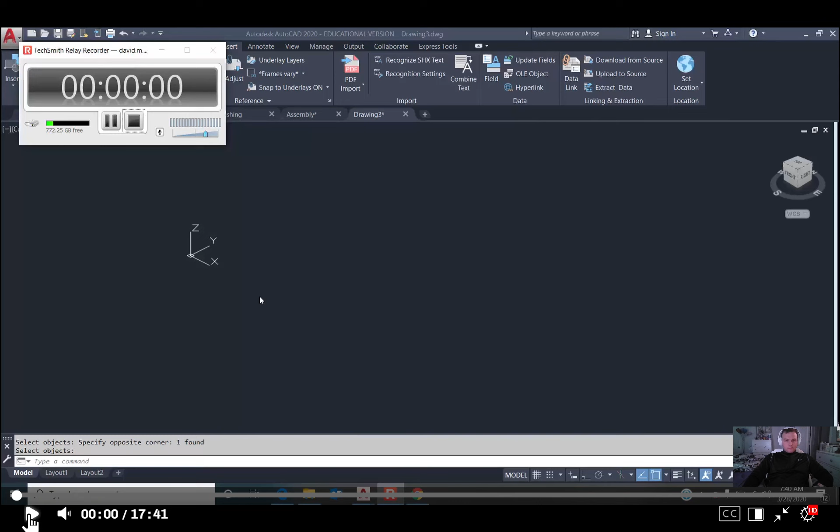Okay, for this unit, we're going to make an assembly. We're going to create three drawings: a base, a cap, and a bushing. Then we're going to assemble them, take them and put them in a drawing. I have provided for you the bolt.

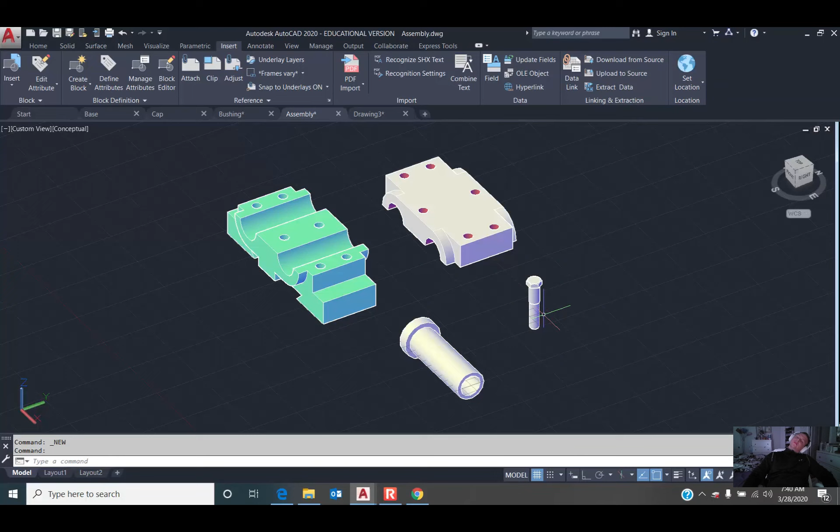So we have the base, the cap, the bushing, and the bolt. The first thing we want to draw is the base, so let's start drawing that. You can find your PDF files if you need them, the ones in the drawing that have all the dimensions. Look at the PDF file as you have done in other classes, and draw from that using those dimensions.

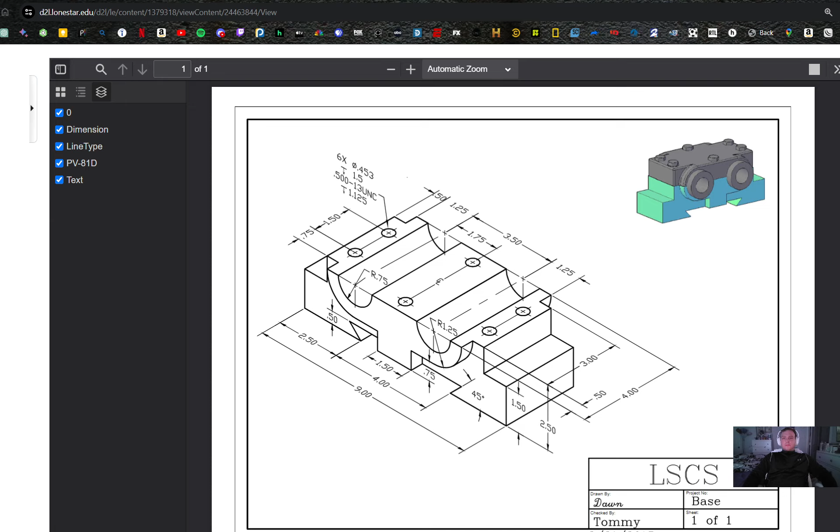So the first thing we want to do is go over here and draw a rectangle. Let's start at 0, comma 0 from the keyboard, and then it's 9, comma 3 units. Now be careful, it's 3 units.

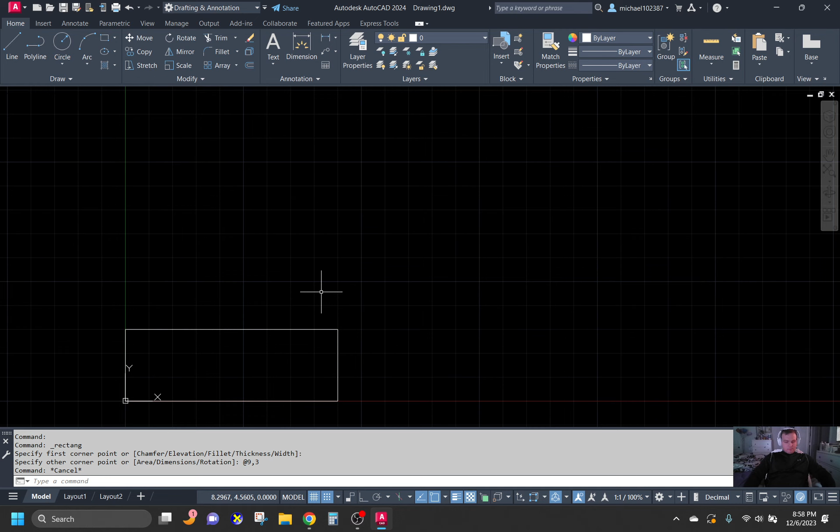Now let's go ahead and extrude that up. We're going to use the extrude command, grab that, and pull it up. The height of this extrusion is 2.50. Okay, we're going to put it in.

Now what we want to do is start working on making these cuts in here. I'm going to go ahead and start the second part up here. So let's take our UCS first. UCS, 3 points, 1, 2, 3.

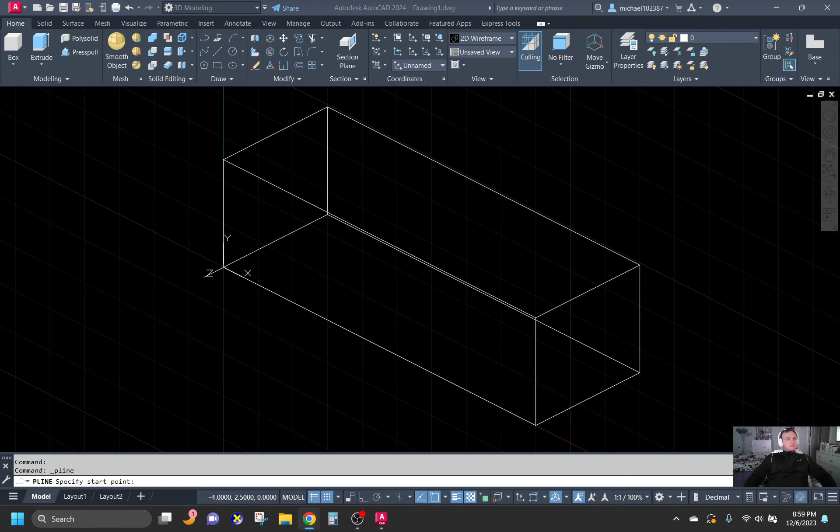I'm going to use my polyline like I have done in the past, and I'm going to cut out these two edges right here. I'm going to come over, it's 1 unit over this way, and 1 unit down, 1 unit over here, and 1 unit down. So 2 notches over here.

So let's do it, let's use a polyline. I'm going to pick a point there. I'm going to come over with F8, which is going to allow me to move over this direction straight, 1 unit, and then move down 1 unit. Okay, I'm going to come over here and draw a rectangle.

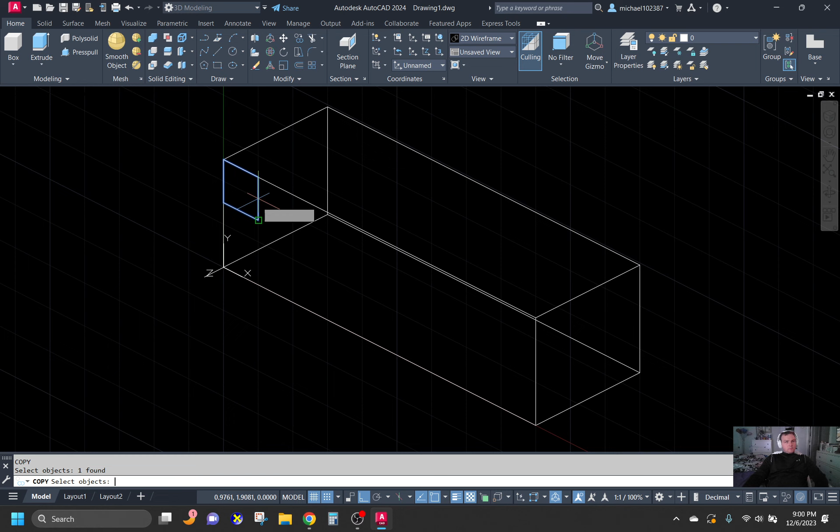I'm going to copy, CP for copy from the keyboard, copy that to this element over here. Then I'm going to extrude both of these elements, pull them through. Now let's subtract them: main object, enter, take these two elements out. I'm going to go ahead and erase this polyline that I used for a guideline.

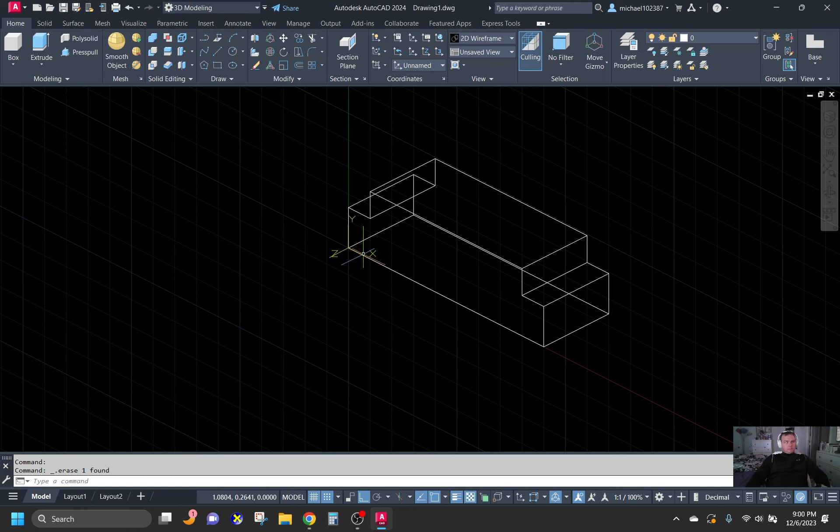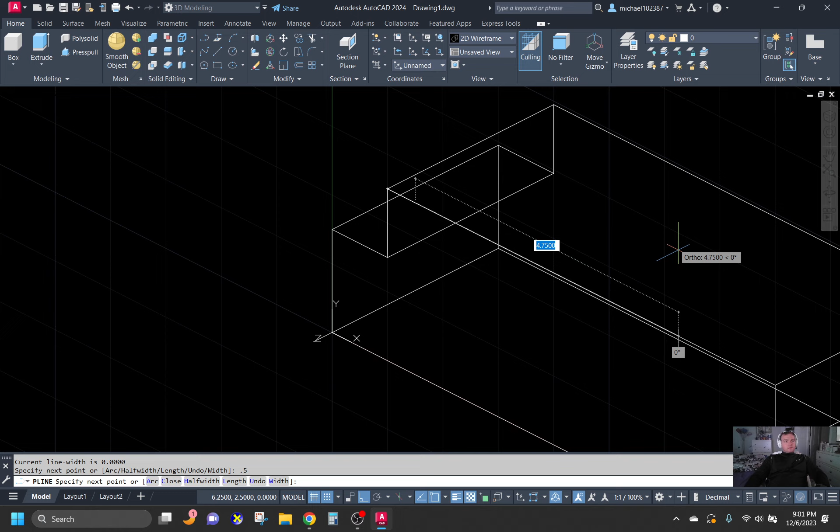Plan, okay, that will turn the view normal to the screen. The UCS, the X and Y will be normal to the screen. So now we can draw. I'm going to draw a polyline and pick a point.

Again, just 0.5, that gets us to there. And then 1.25 gets us to right here. And then we're going to go over 3.5. Okay, that'll get us to here.

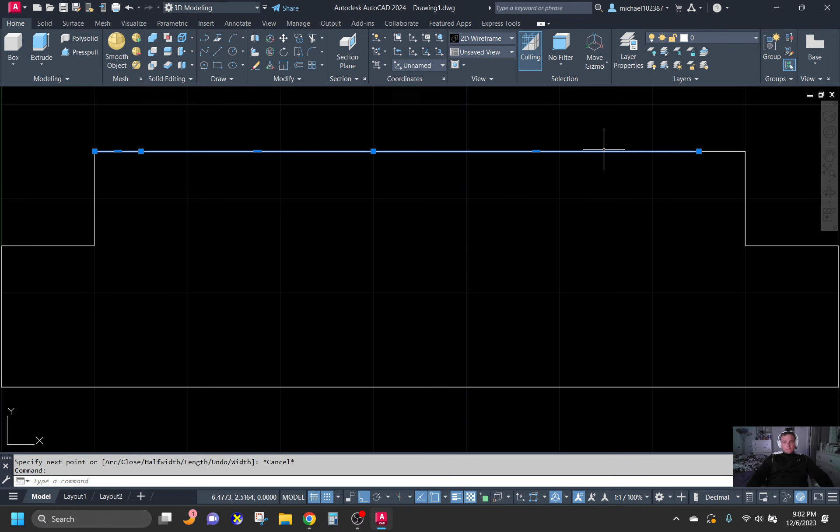Then I'm going to come back and say C for circle. You can use the at or the object snap. I'm going to pick a point. Again, just 0.5, that gets us to there.

And then 1.25 gets us to right here. And then we're going to go over 3.5. Okay, that'll get us to here.

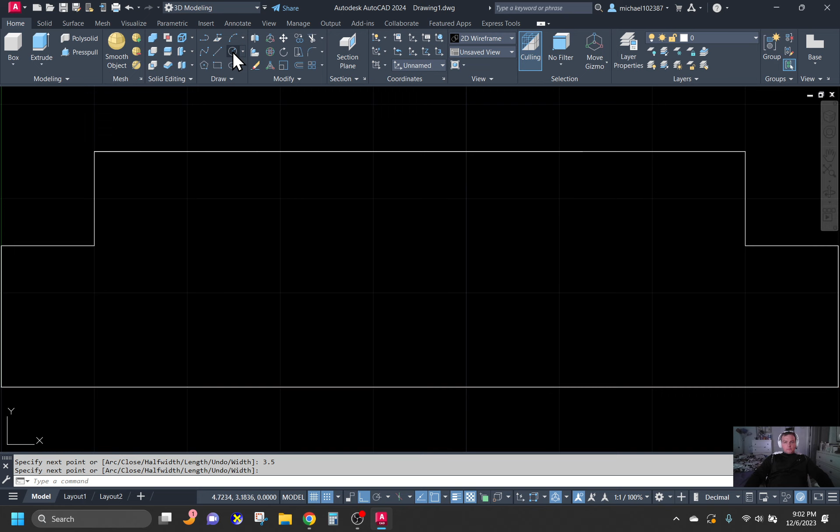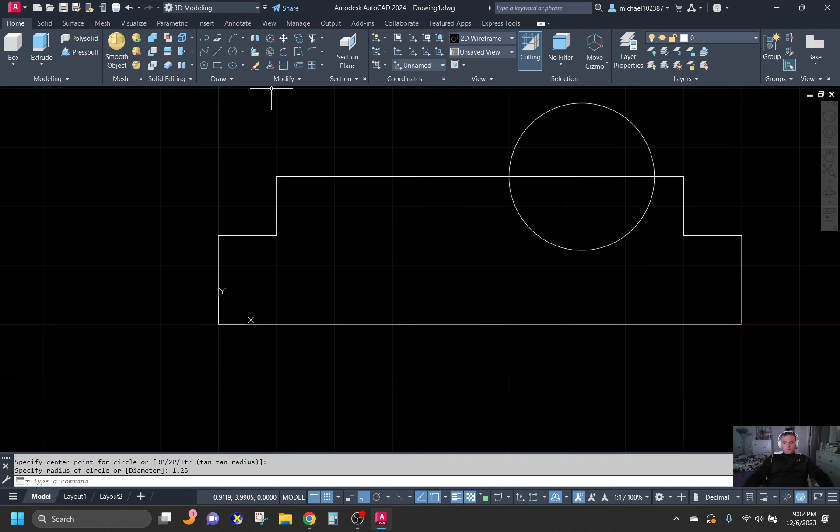Then I'm going to come back and say C for circle. You can use the at or the object snap. Find your last point, and the radius we want on this is 1.25. Enter repeats the last command. Find the last circle, put it in there.

Now I'm going to draw a polyline. I'm going to go from the quadrant of my element here to the quad of this element over here, just like that. Okay, now I'm going to draw another polyline on top. I'm going to use that for a trimming line.

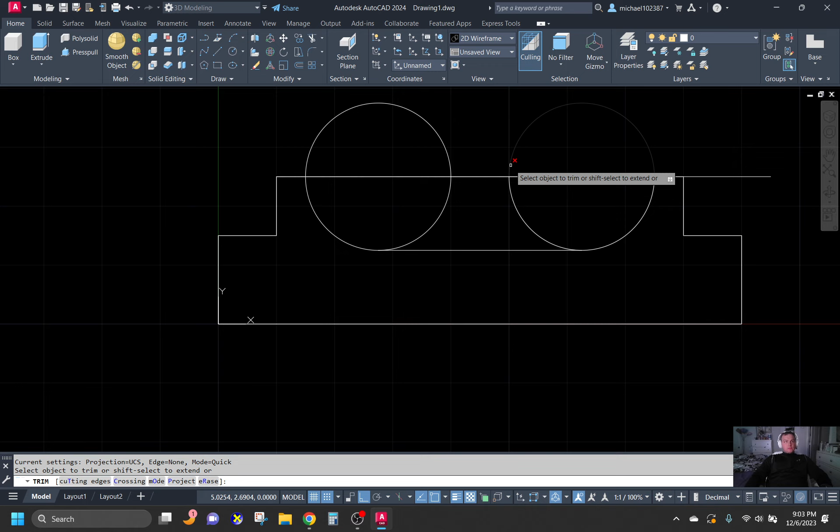Okay, trim, TR for trim from the keyboard, enter again. Then touch the elements you don't want. We don't need this piece, or this piece, or this piece up here. Okay, this is what we're wanting right here.

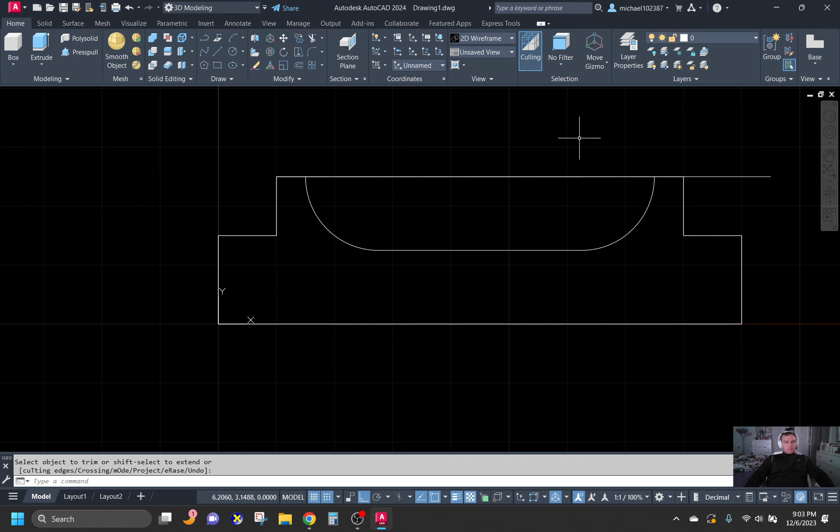I also need to draw a piece right here: 1.5 down, 1.5 over, 1. So let's use the polyline. Again, I want to go to the midpoint, just the midpoint right here. Now the reason I use the 2D poly is so it stays on the same z-axis. So we only want to go down 0.75, correct?

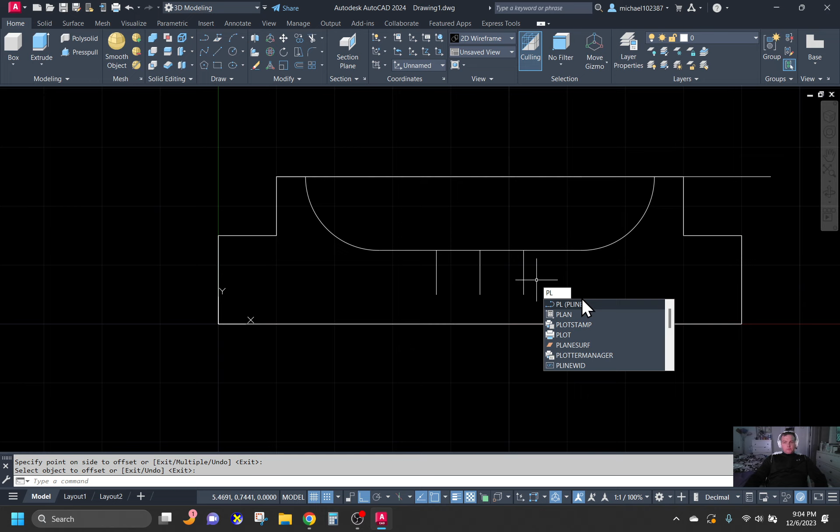Okay, now let's offset 0.75. 0.75 on this side and on this side gives me a total distance of 1.5. Then I'm going to draw another polyline right here. Okay, so let's erase this.

Let's trim, TR for trim from the keyboard. Enter, trim this out. So far we have this. I'm going to erase this line we used for the trimming line a while ago.

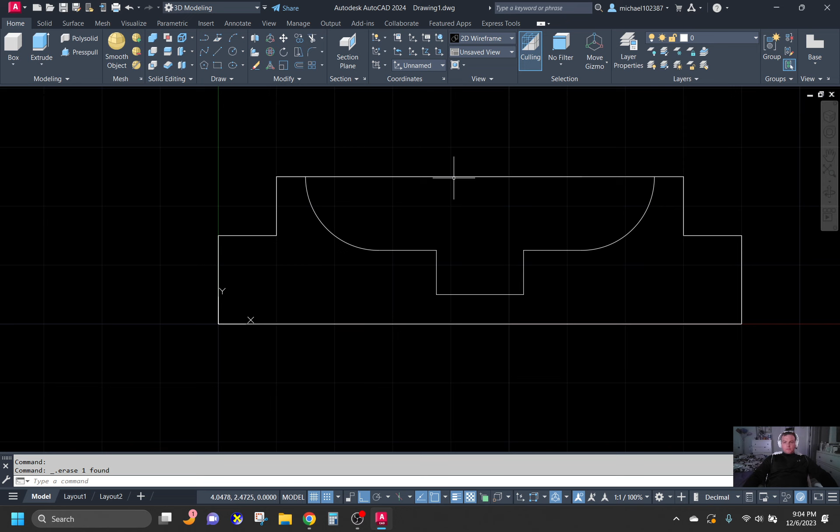Turn my VP 315, 315.30, so you can see it, there it is. Now I didn't draw these holes yet. There's a reason: if I draw them now and cut them through here, they'll fill back in when I add in this piece here. So we'll cut them last.

I'm going to draw what they call a dovetail slot right here. Okay, let's go back to plan view, PLAN. Plan will turn the UCS normal to your screen.

Again, I'm going to use the polyline. I'm going to pull it this way. I'm going to type in 2.5. Okay, I'm going to pull it up this way, just 0.5. I'm going to come all the way across over here, 4 units, and I'm going to pull it back down to here, 0.5.

Now this is just going to help me construct my dovetail slot. I do want to come back and do a polyline, and pick a point right here from the keyboard, angle override, the little less than sign, 45 degrees. Move your cursor, see how it goes to 45 degrees?

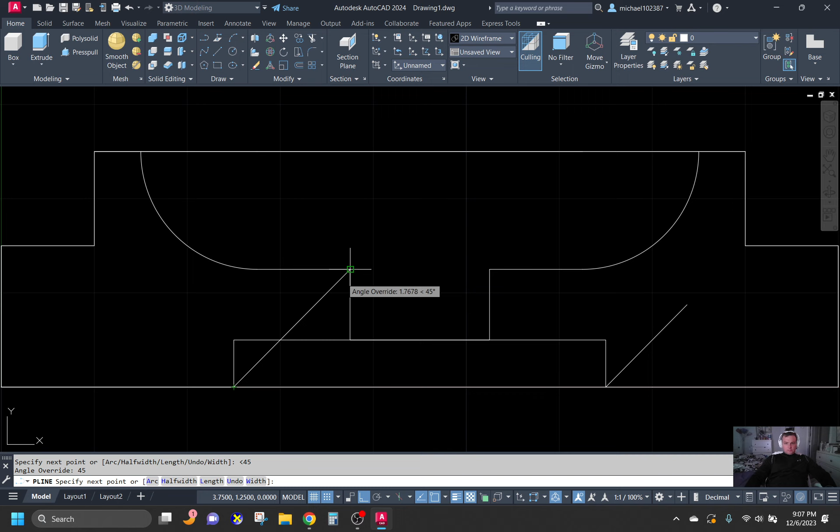Now let's use the fillet command up here. We're going to use a 0 radius, and we're simply going to touch that line and that line. See how they... okay, let's do it again. Fillet this line and touch down here, that line.

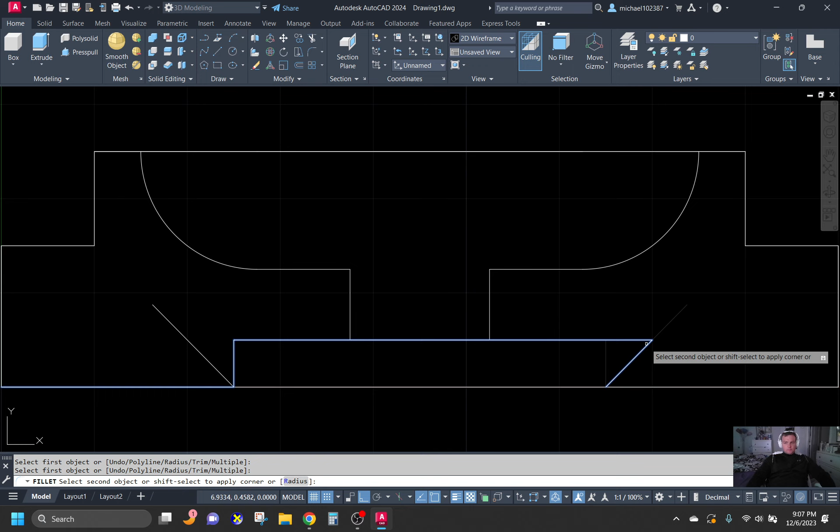There's our dovetail slot. As you can see, this is not one solid element - this is actually arcs and lines. So what we've got to do in order to work with it, remember, is we've got to have a closed entity.

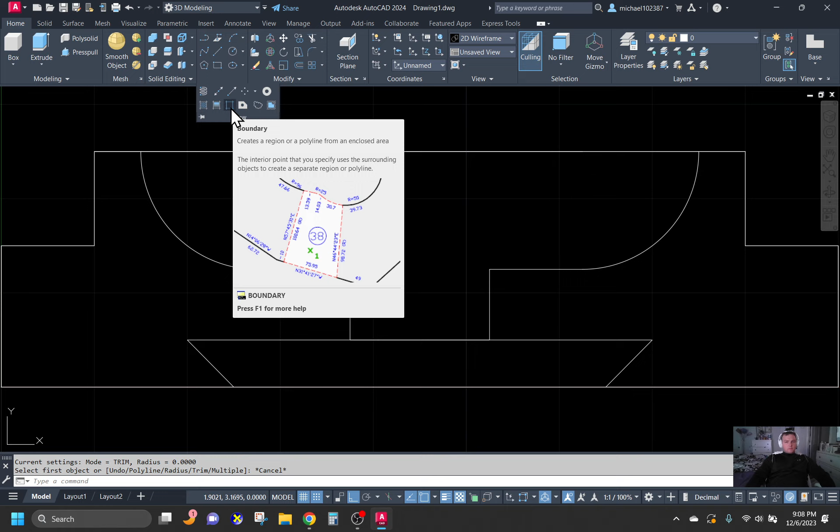So I'm going to use draw. We can use region or we can use boundary. In this case, I'm going to go ahead and use a boundary. I'm going to pick a point in this area right here - as you can see, it highlighted it. And then I'm going to do it again, enter. I'm going to pick a boundary down here, enter. Okay, everything's set up.

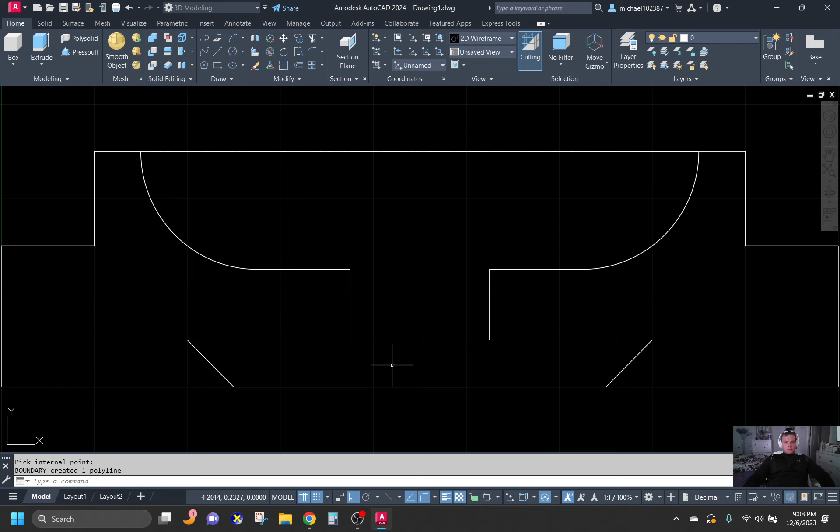Let's do the VP, 315 and 30, let's go this direction. First of all, we know this one's going all the way through, so we subtract - select it, extrude it through, and subtract it. Main object, enter, choose this end, extrude. Okay, looks good so far. So we have a conceptual design with our dovetail.

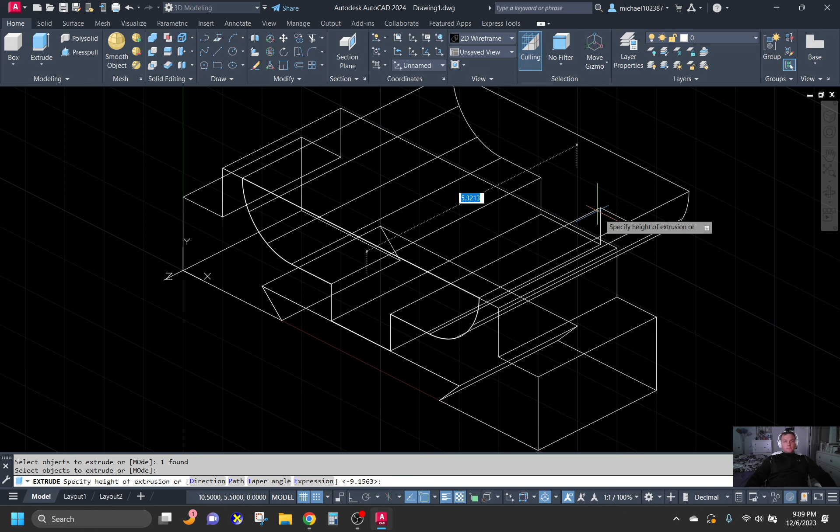Next, we want to extrude this. Now I'm going to extrude this, take this, extrude it, and this extrusion is 4 units. I'm going to move it out of the way - I just drew it, move it over here a little bit so we can see what's happening. Color - I'm going to change my color to yellow for this procedure.

I'm going to draw a polyline. First, after I change my color, I'm going to change my UCS back to world. UCS, enter, world, enter. And then I'm going to draw a polyline, and I'm going to go from the midpoint of this element to the midpoint of this element back here.

Now that's on this one. I'm going to come down - shades of gray, I did it on this one only. See it? Then I'm going to do the same thing on this one over here.

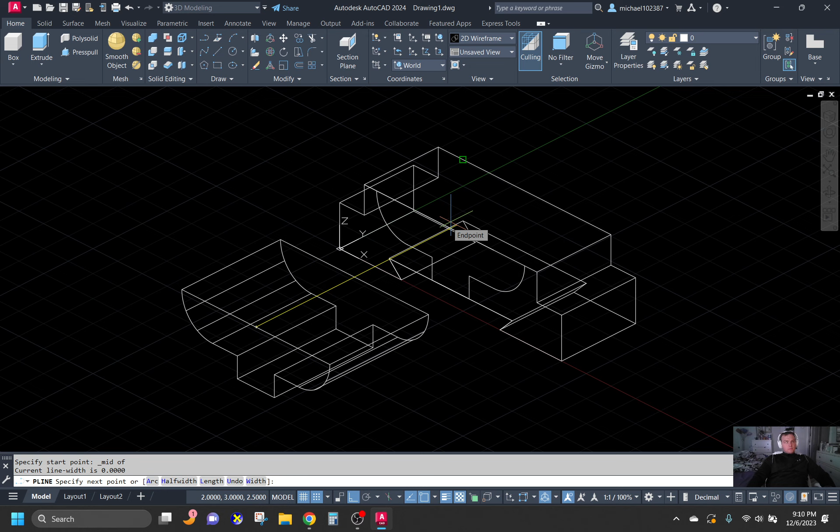I'm going to go from the world, enter, and then I'm going to draw a polyline, and I'm going to go from the midpoint of this element to the midpoint of this element back here. I'm going to go from the midpoint of this element, this edge, to the midpoint of this edge over here. Now what that does - that's the middle of this object, and that's the middle of this object. These are two common points, this point and this point.

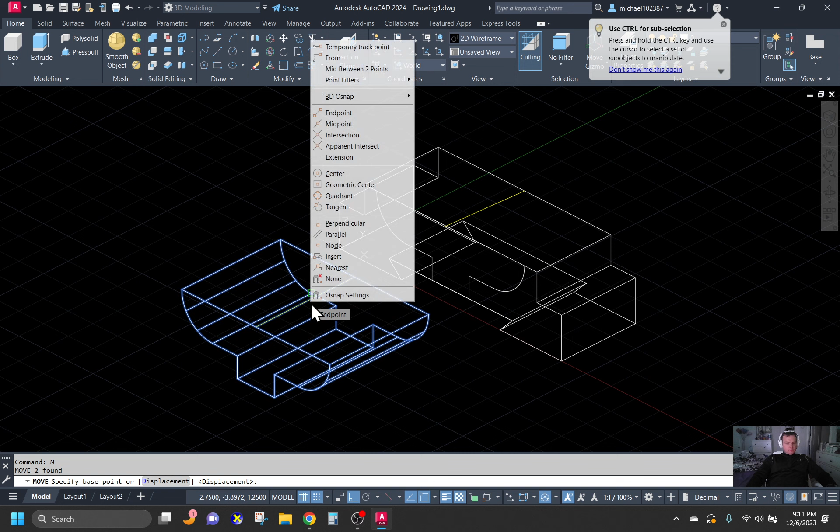So if I say move, I grab this element right here, and I move it from this midpoint, grab the line, to this midpoint, then we'll place it in there for me. See? Nice and neat.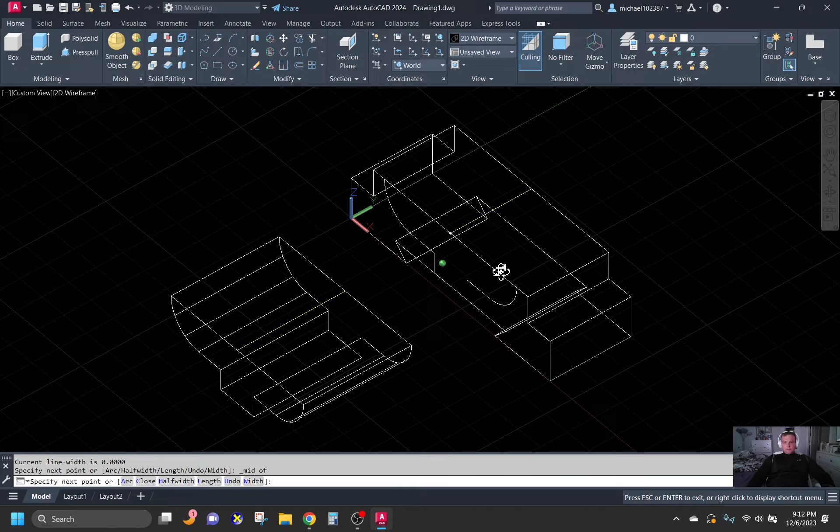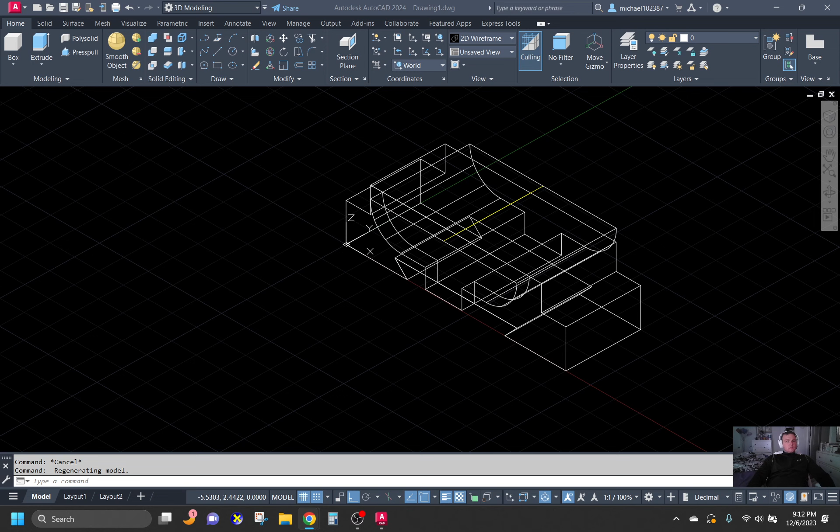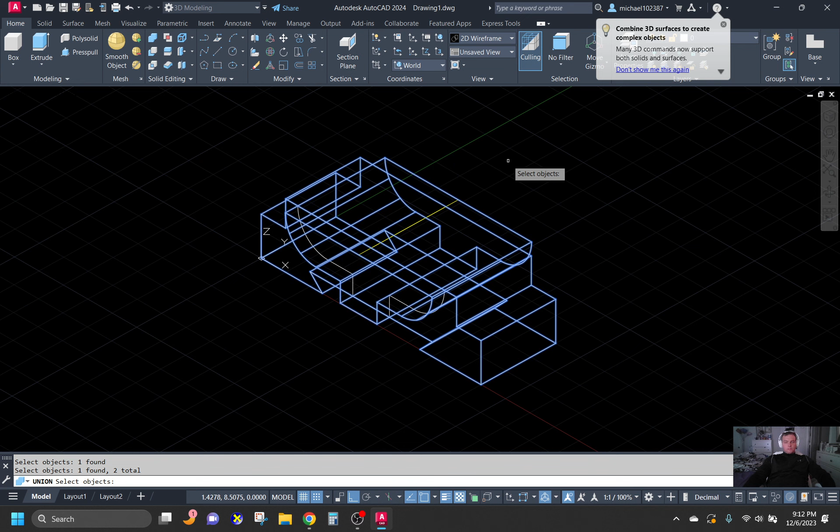Let's union these two. I grab this element right here, and I move it from this midpoint, grab the line, to this midpoint, then we'll place it in there for me. See? Nice and neat. So let's union these two elements - let's put this one and this one together. And there we have it.

Now we have extra lines in here, so E for erase, all elements to remove. Let's remove the model.

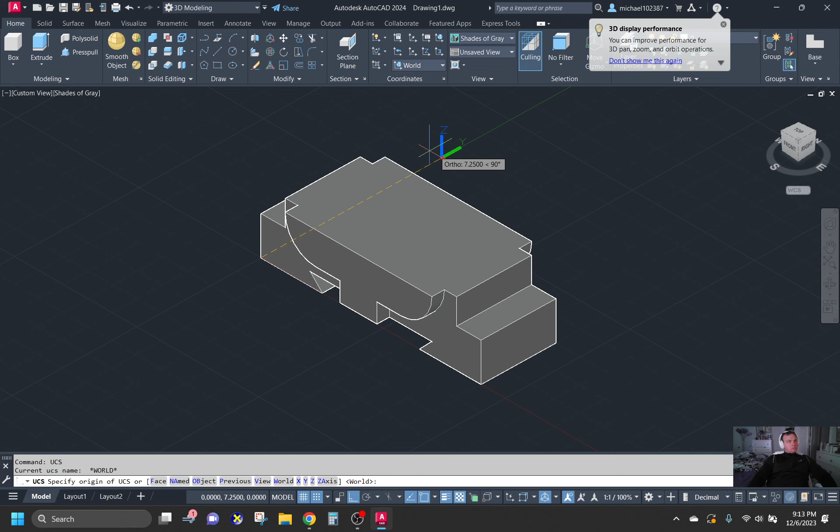Okay, now let's take our UCS - see your object. UCS, 3 points again, 1, 2, 3. We come back and draw a circle. Make sure you're referencing this arc, don't hit this one by mistake - reference this one. Find the center, CEN from the keyboard, and the center.

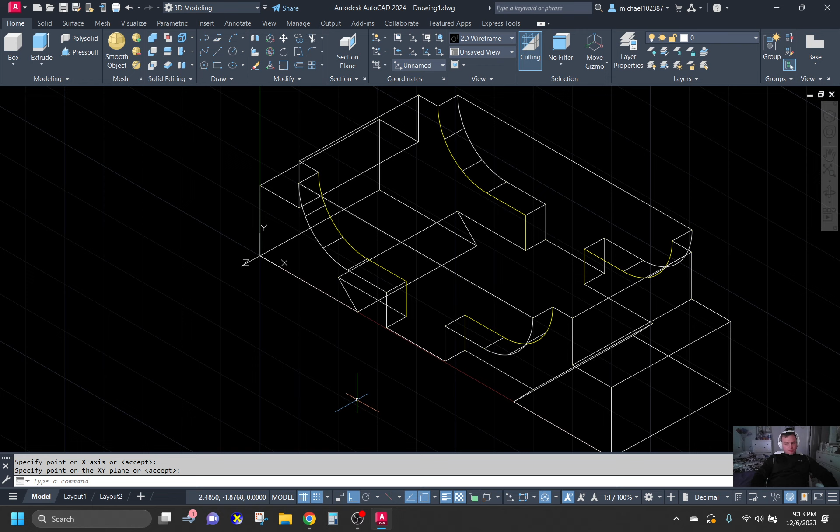And this is going to be 0.75, enter. Okay, we enter it again. We come over here again, reference the center of this outside arc here, center, CEN from the keyboard.

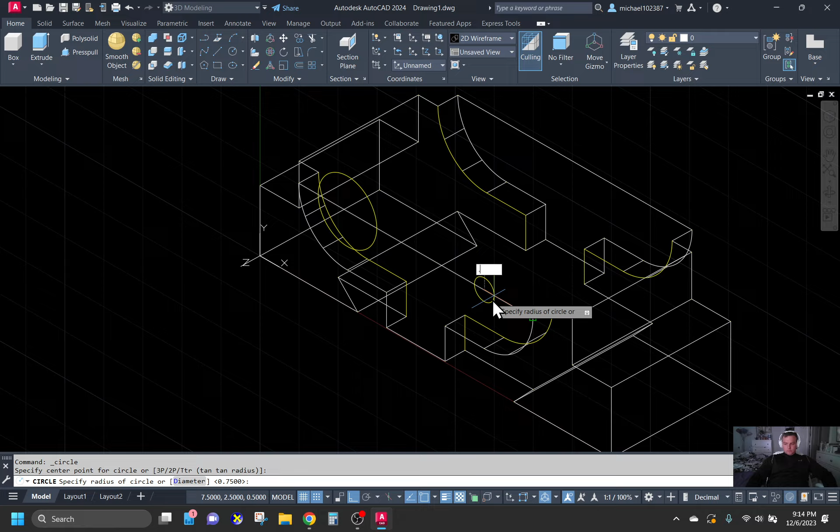From the keyboard, make sure you reference this outside arc, not the inside, the outside, and then enter. Now we'll cut it. This is the appropriate time to cut it.

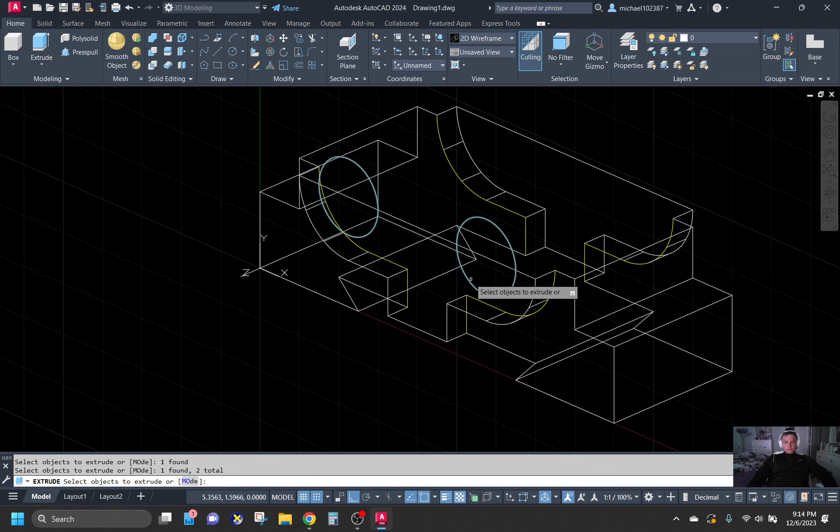So we'll say extrude. We'll take this element, and we'll extrude it through. And then we're going to subtract. Main object, enter. Take this object out.

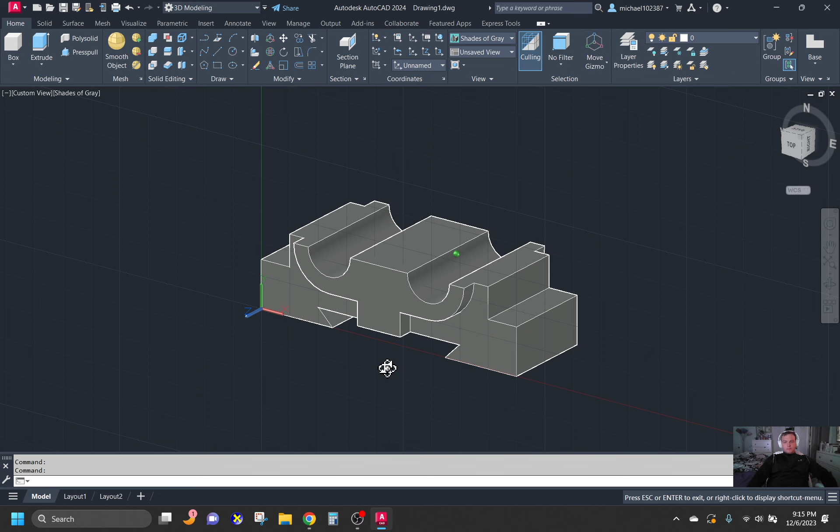Okay, looks good. We're going to come back over here. Looking good. Now what we want to do is cut the holes in here. But be careful, the holes in the cap are different diameter than the holes in the bottom.

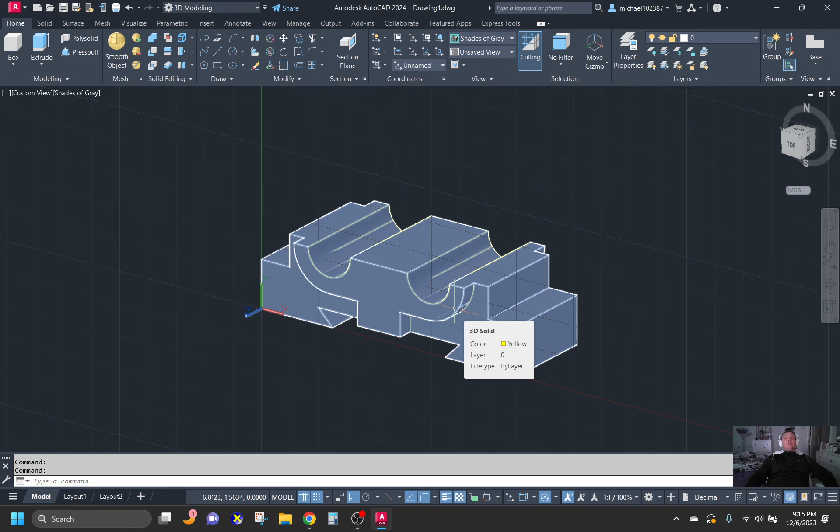The holes in the cap are straight through at 0.516, and the bottom are 1/2 inch, 13 thread Unified Coarse. That's what 0.5-13 UNC means: 1/2 inch, 13 threads per inch, and it has a depth of 1.125.

I'm going to come over here and grab my polyline. I like my polylines. I'm going to pick this corner, this edge right here, and we want to go over. Oh excuse me, UCS, set the UCS back to world. That was my mistake.

Polyline, now we're ready. So we'll pick a point here. We go 0.5 here, and then we go down a little bit here. What's the distance in there? 0.5. And then we go back this way, 0.75. Okay, now undo that last one.

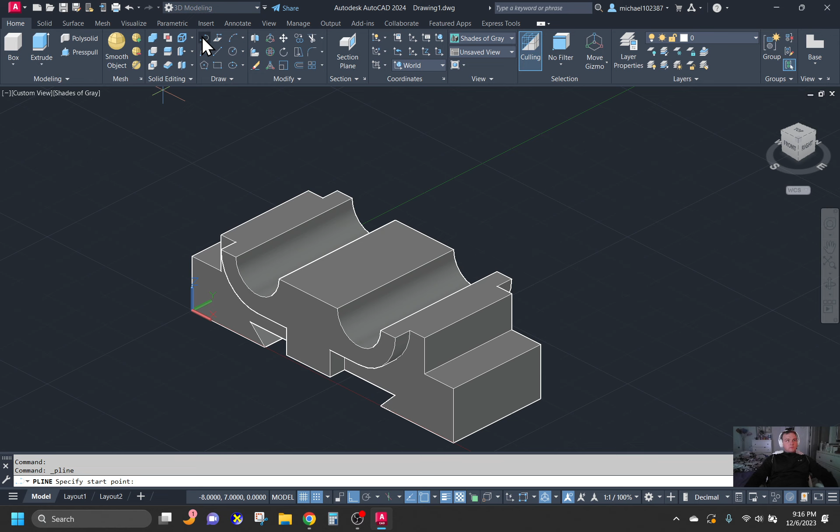Let's try that again. Let's do a polyline. Let's pick a point, point it in this direction. Tell it 0.5. Okay, 0.75 — I've made my mistake, 0.75. You want to go from that corner, 0.75, then we want to go in 0.5. Now we want to go back over this way, 1.5.

Okay, there we go. Now let's say C for circle, shift-2 at sign for a reference to the last point, D for diameter, and that's 0.5. Enter repeats the last command. Find the end point of that circle and press.

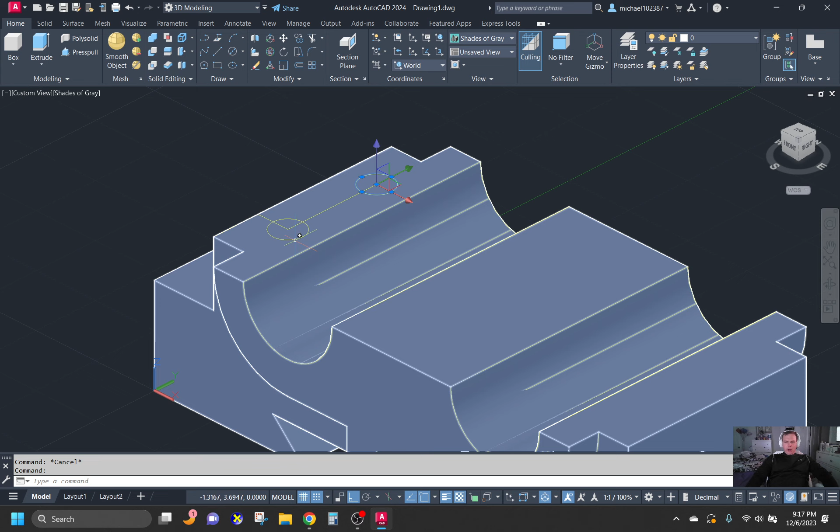Now we've got 2, so let's go ahead while we have them. Let's go to modify and go to mirror. Let's take this one and this one and mirror it about the midpoint. Find the midpoint, MID, midpoint of this edge right here. You'll see it projects it down to the UCS and then projects this way, okay?

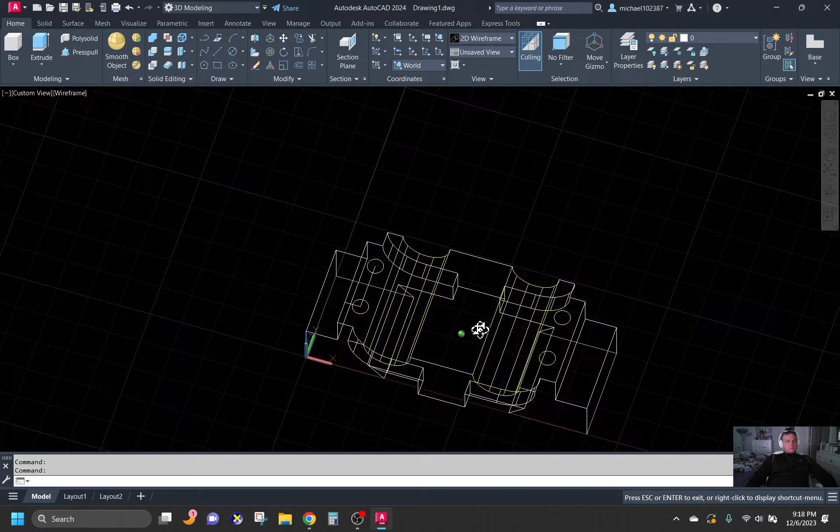I'm going to go to the wireframe to do this so I can see what I'm doing better. Modify, mirror. I'm going to choose this one and this one. Enter. Come down here to the midpoint, MID, midpoint. Touch this element, see how it finds the midpoint — it projects down on the UCS, but it is there. There's the midpoint. And there it is.

Escape. I'll do it again. Modify, mirror. Take these 2 elements. Go from the midpoint to the midpoint over here. Press enter.

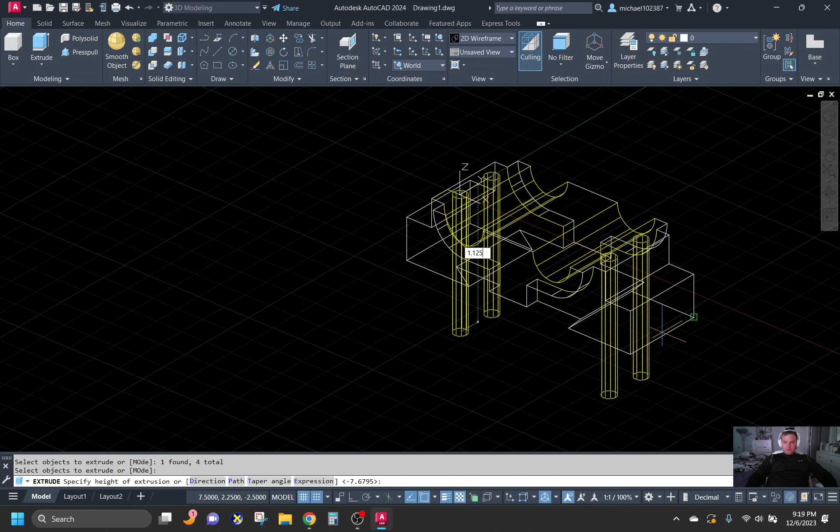And then we're going to extrude these elements. And the depth is negative 1.125 — negative 1.125, and that's the depth of the hole. These are threaded half-inch holes.

Now we also have another set of holes right here in the middle. We have not cut these, these are still cylinders. Do a little conceptual — ooh, that was better, our wireframe.

So let's go in, let's create a polyline from right here. Now from that set of holes to the next set of holes, these line up this way. So what we want to do is pull that in, we want to be right in the middle here. So let's see what happens. Let's go this way, 3 units, and see if that's in the middle. There it is, perfect — 3 units that way.

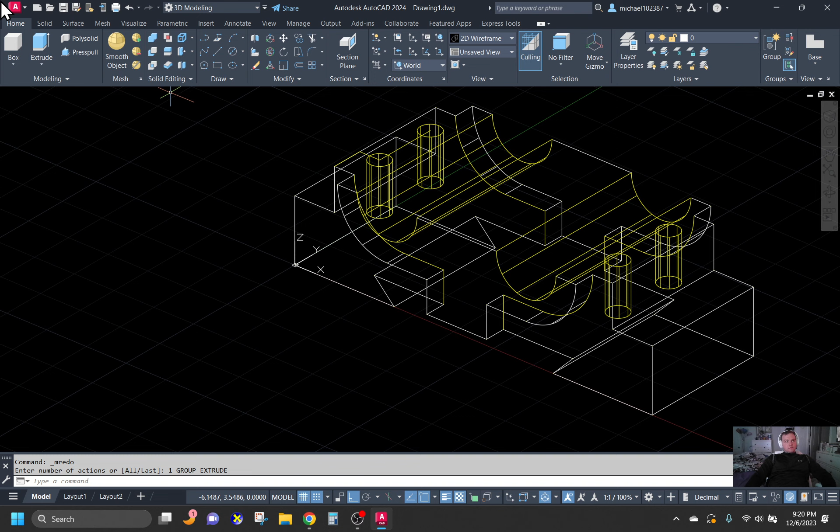I'm going to come over here, pick that, 3 units that way. I'm going to copy this hole, using the center of that to the end point of that to the end point of that. And then we're going to enter it. I'm going to erase these lines that I no longer need, that I used for guidelines to set everything up.

Take a look at it, make sure it's nice and symmetrical looking. We can shade gray if you want to.

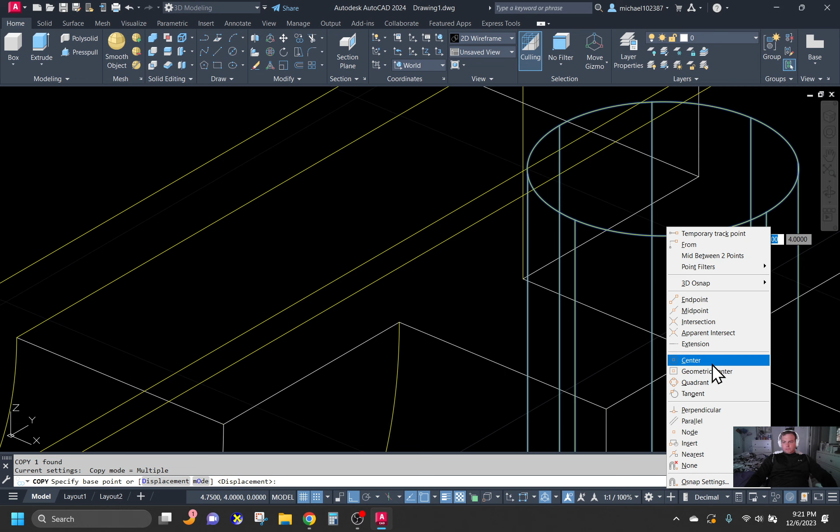See that? And we've noticed one thing — missed subtracting the holes. So let's go into subtract, main object, enter, take this one, this one, this one, this one, this one, and this one out. And there we have it.

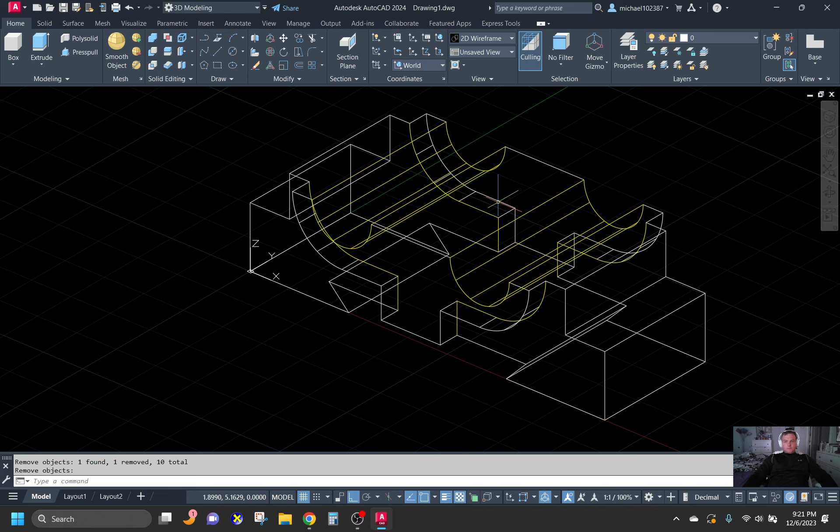I'm holding my hand on the shift key, pressing on the mouse gently, and you see we have the holes. The holes don't go through, they just go down.

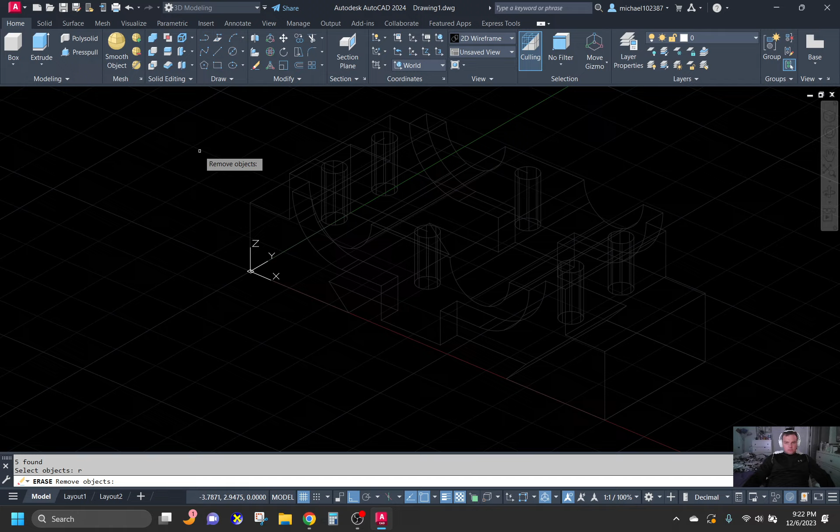So now you want to save this drawing: file, save as, and we're going to call this base, B-A-S-E. Just call it base — I call it base temp because I already have a base. So I'm going to call it base. All you want is the model, you don't want to generate drawings or nothing, you just want the model.

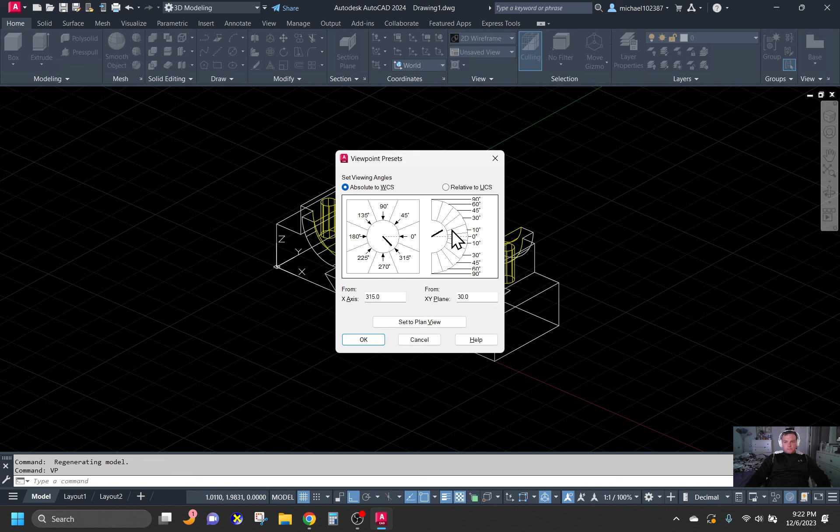Okay, now we're going to move next, we're going to move up to the cap. So after you finish this, save it as base, and then move over to start the cap.